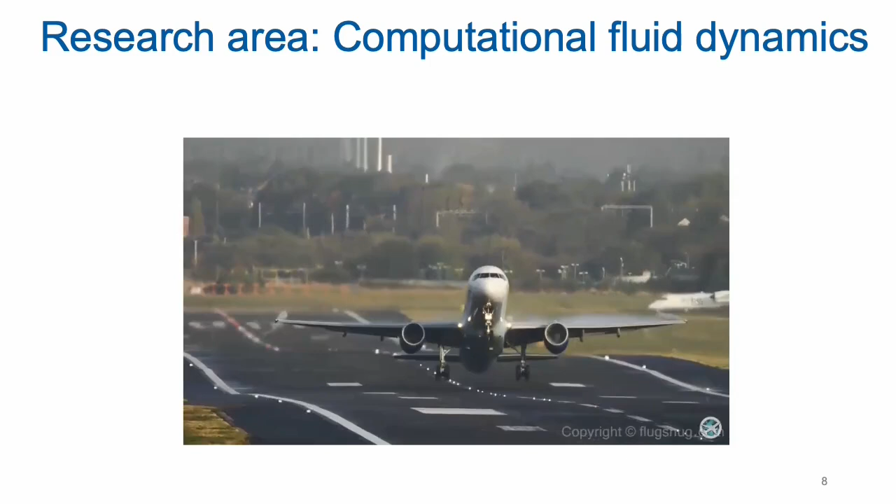I'll start by introducing my major, which is aerospace engineering, with a research area focused on computational fluid dynamics, flow control, and multi-phase flow. Basically, I use computational methods to simulate aerodynamic properties and provide solutions to enhance engineering performance. So from this, you can see I'm doing computational work.

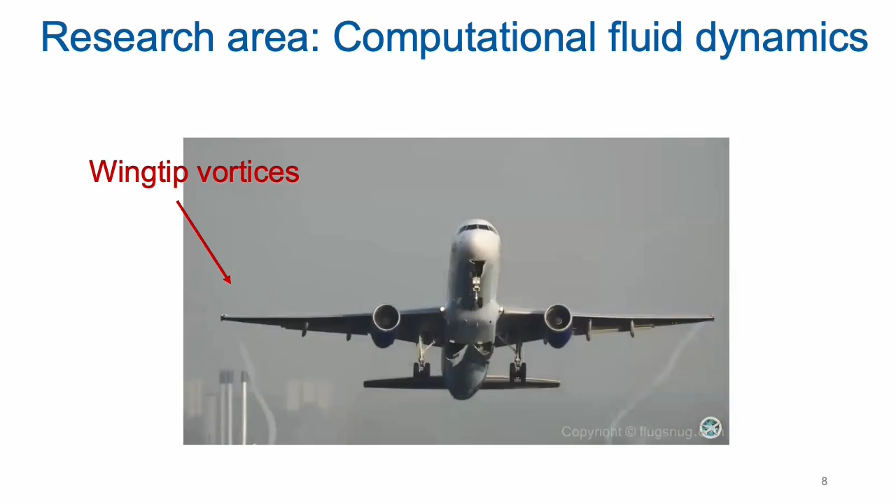For example, here is a video about airplane takeoff. You will see the air flying over the airplane generates so-called wingtip vortices. You may wonder why we care about wingtip vortices. We care because they increase drag and reduce the maneuverability of the airplane.

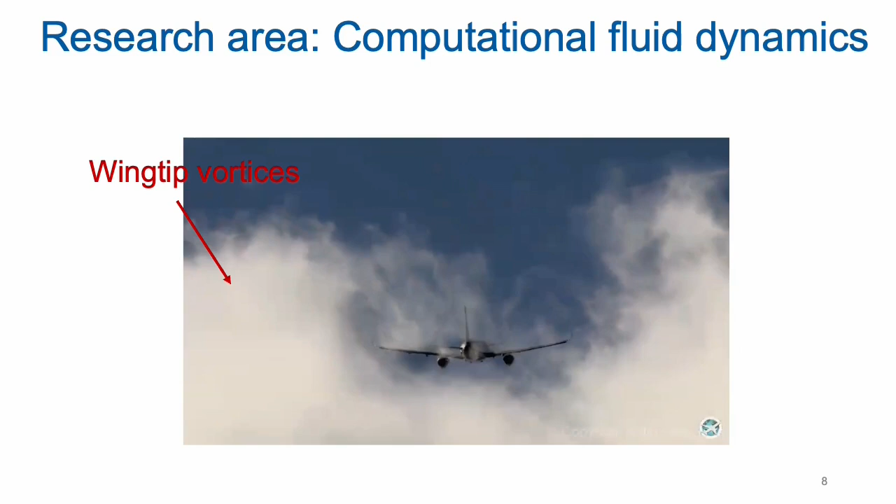If we can use control techniques to suppress the generation of the wingtip vortices, it can help reduce the drag and enhance performance. Reduce the drag means less fuel cost, less carbon emission, and less pollution. So that's why we care, and as engineers we try to provide a solution to optimize the performance.

So next time when you get on the airplane, make sure you check this small part installed at the wingtip. It's called winglets. This is a design to suppress the wingtip vortices and reduce the drag. It has been widely used in commercial airlines.

Here is another example about the landing gear system, which we saw in the previous video of the airplane, and also the weapon bay or cavities. Every time the door opens, you see strong oscillations in the cavity. Engineers are very interested in controlling or mitigating these oscillations.

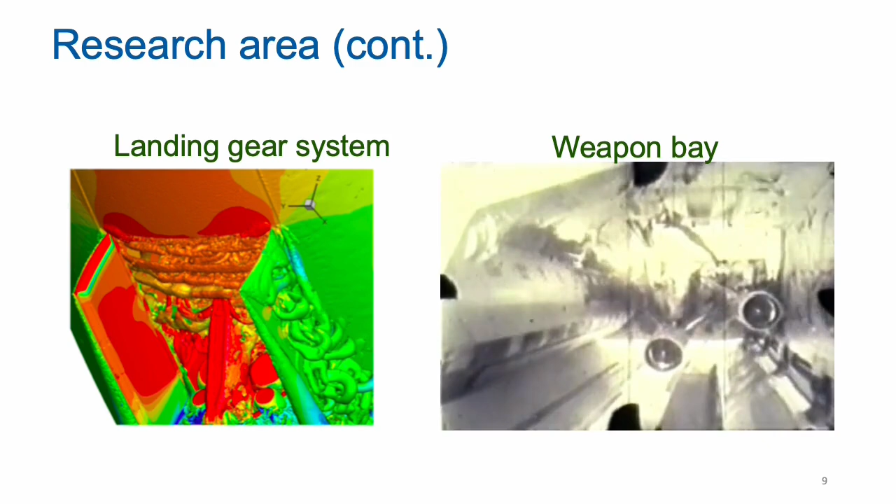Another research area is flow control. Here is a good example to show flow control, flow over a circular cylinder. In the uncontrolled flow, you see the oscillation of the vortex. It exerts vibration on the cylinder, which is usually called vortex-induced vibration.

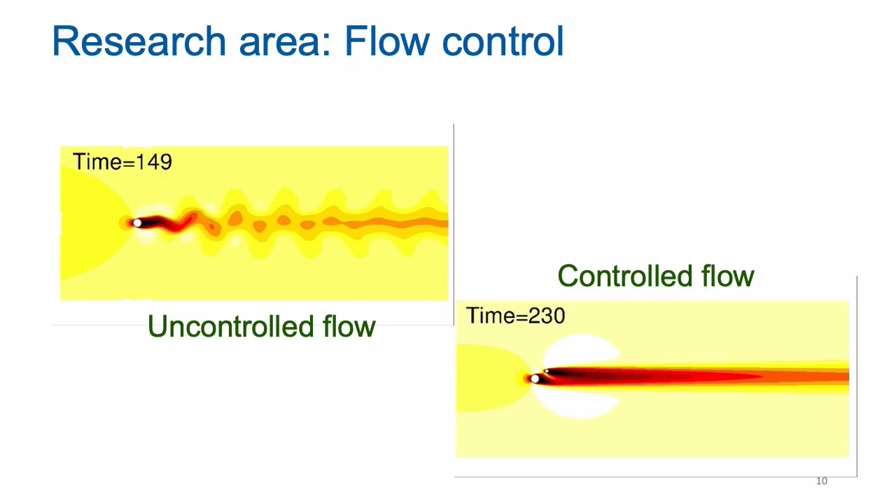If we place a small cylinder behind this big cylinder, the controlled flow becomes completely steady. So we can use the controlled flow, leveraging the control strategy to suppress the oscillation. But remember, you can't just place this small cylinder anywhere behind the big one—it must be in a sensitive region. That's what we use numerical methods and theoretical analysis to determine.

Another research area is multi-phase flow, particularly particle-laden flow. Actually, the atmosphere is not pure gas or air; it contains various dust particles. Those dust particles come from volcano eruptions, water droplets, ice crystals, and so on. Those particles are usually in the micrometer scale—very tiny, but they could cause severe damage to the vehicle.

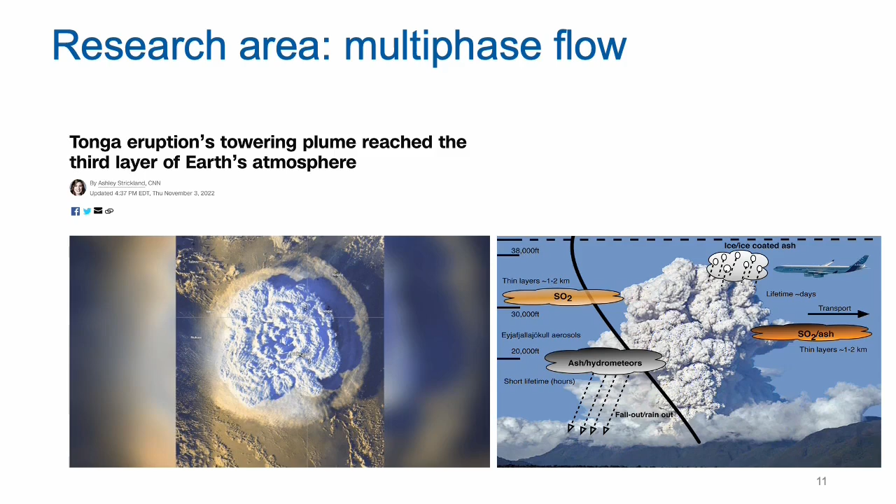Shown here is an illustration of a volcano eruption. It can reach high altitudes such as 38 kilo feet, the layer where airplanes usually travel. The potential damage can be structural, as you see here on the left. Also, because the engine works usually generate heat, the high temperature could melt the particles into liquid, which can stick to the engine surface and clog the ventilation.

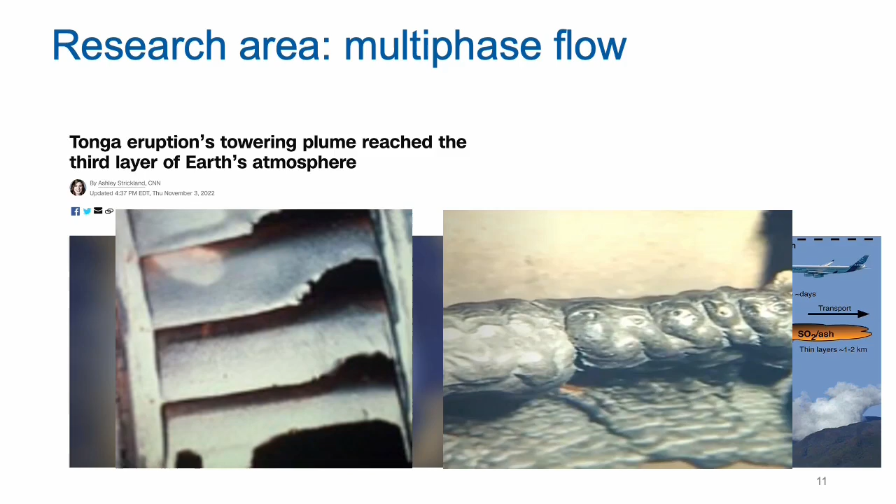So one of my research topics is to characterize the trajectory of particles depending on particle size, materials, the effect of flow structure, and surface impact.

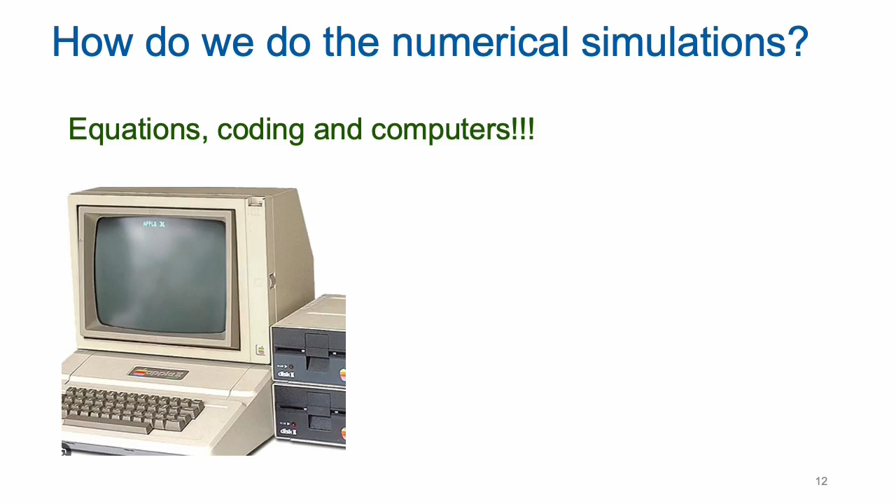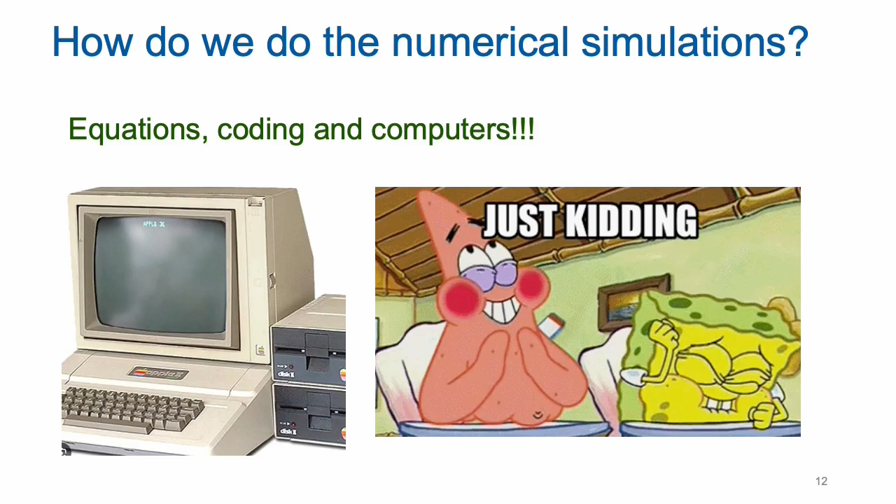So the kind of work we do is numerical simulation, using coding derived equations and computers. We do use a personal computer to test and program the code, but most cases run on high-performance computing centers located around the U.S., from the east coast to the west coast and north to south.

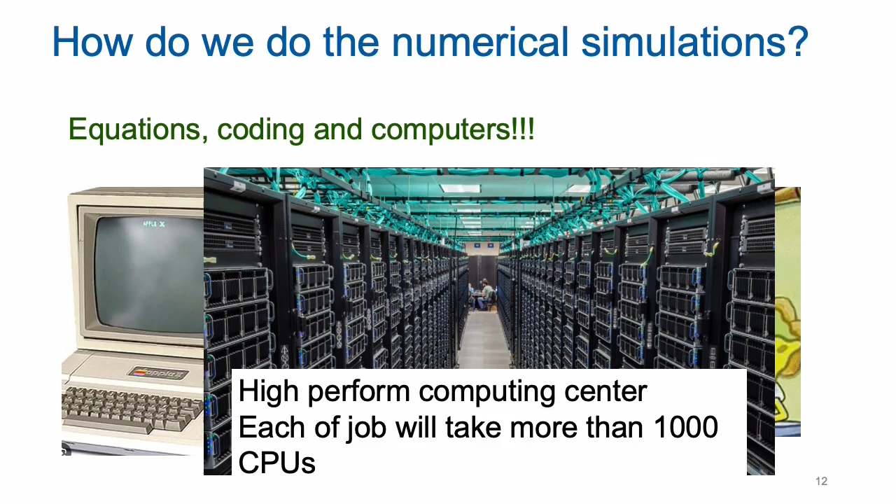Okay, now you get a little bit of sense about what I'm doing. Let's shift gears and talk about future careers in STEM. As I said before, STEM stands for science, technology, engineering, and math. The potential career options are in a wide range. For example, you can be a scientist, researcher, or engineer in a national lab, such as NASA, Los Alamos, or Sandia Lab.

The requirement for diploma ranges from bachelor, master, to PhD. New Mexico State University holds a career fair every year. Also, if you like academia, you can be a professor at a university. Most require a PhD degree, and you have the freedom to work on your own research interest. Almost 99% of universities have STEM programs.